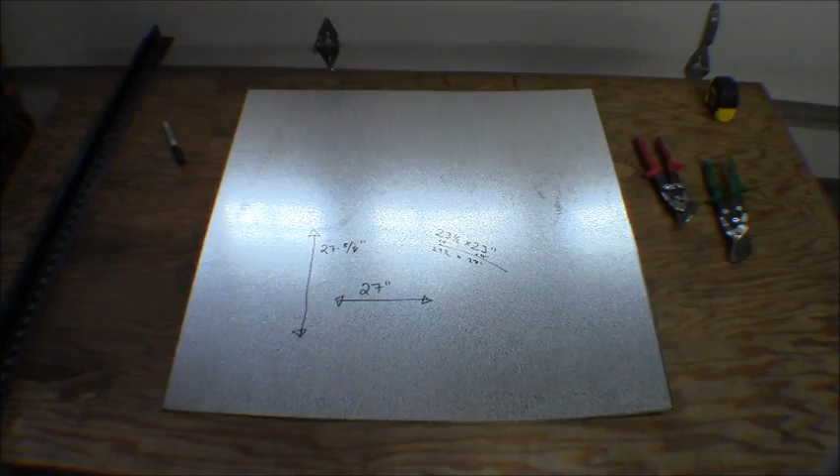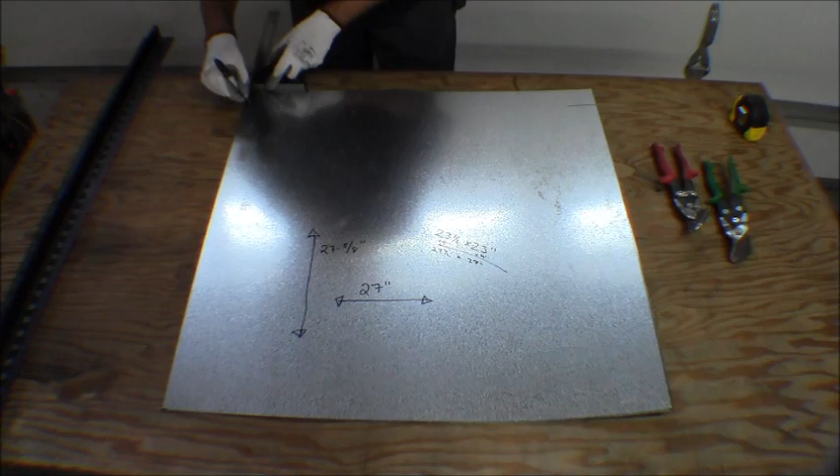Okay, I need to do a 2-inch measurement and mark these off on the sides, the corners. So I got my tape here set to 2 inches. I want the long side to have the overlap on it. So I'm going to go like this. Just an easy way to do it like that. Like I said, this doesn't have to be perfect by any means. I'll do it on both sides here, but just kind of make that easy.

Okay, we're going to want to do our depth. This is how far deep down we're going to be doing our bend. The bend will be on these as well. I want to mark off on these right on the corner junction, and possibly one more in the center just for good measure. Do the same thing on the other side. And we'll be bending these this way too, so I'm just going to mark this one as well. Just on the side.

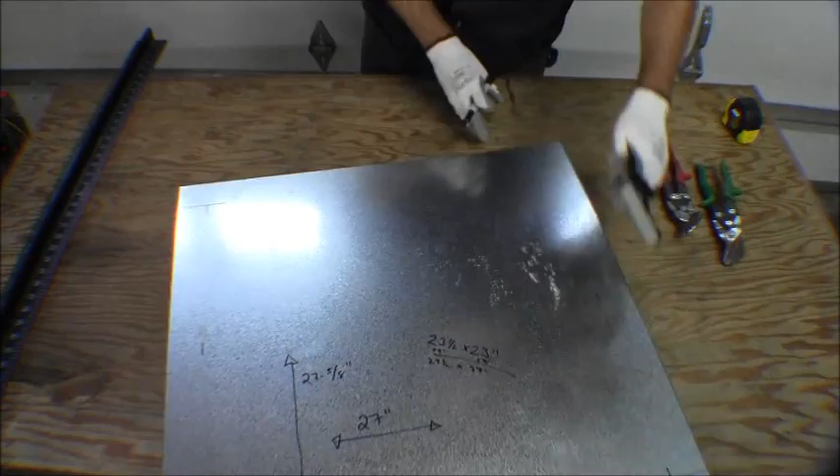Okay. Like I said again, mark, and we know this is going to be our long tabs going that way. So I'm just going to use some of my side cutters, sheet metal offsets. I'll cut these by hand. When you do this, they have on this lower part, basically this curved part, that's the part that's going to be pushing up the sheet metal.

And so if I do it this way, just for reference here, I can do one of each, just so you get an idea. I'm only going to cut back a little bit to about right there. See how this side lifts up onto that, so it already starts to bend. So coming back and bending this, it has that little bit of lip to it, so it catches, so it makes it a little harder. So on this side, instead of doing the green, which would lift up this as well, I'm actually going to come back with the red ones and lift up the side that we're going to be bending first.

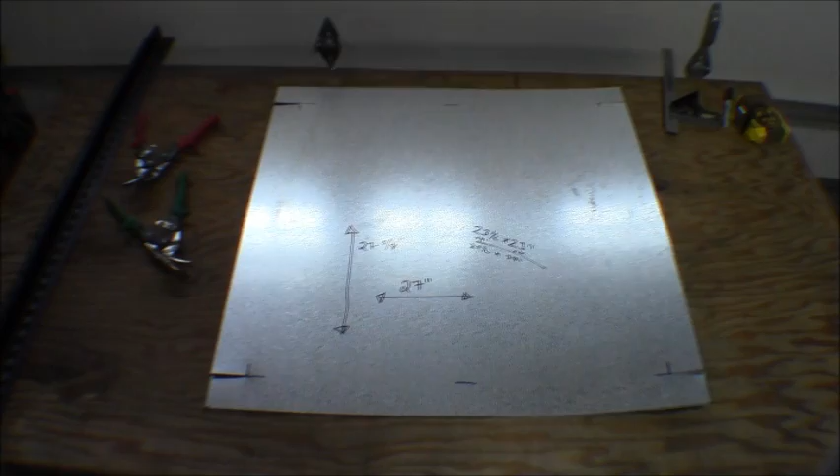Okay, so I'm going to clear out the workspace here. This is a good time to double check your measurements and make sure that where you bend is going to get what you need. Our most critical one is the 23.5. We need 23.5 inch clearance here for the width of our washer. So coming on here, tightening this up, I'm right at 23.5. So I want to make sure when I bend this that I'm not coming inside these lines.

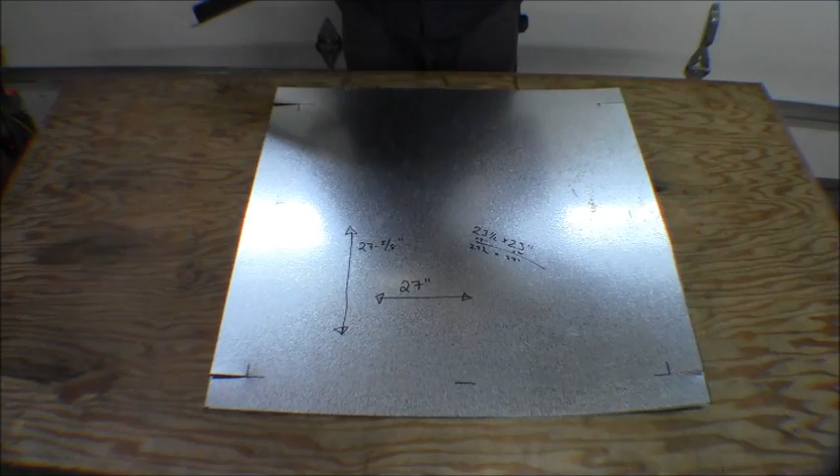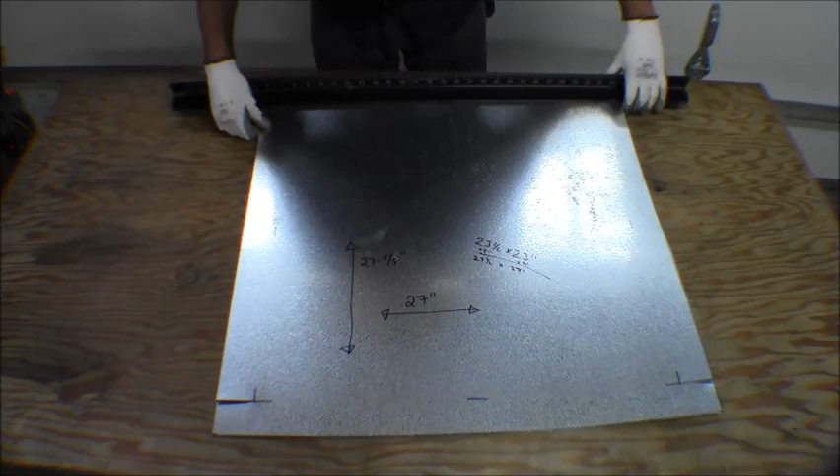So like I said, using the Handler's bender or any other brake or homemade thing that you got. Just gonna slide this in here. I'm gonna go right on that line. Once you get it set, just kind of put a little bit of pressure on it. Push it down, and back or forward until you get a good angle that you like.

We'll kind of bring that around here so you can see our 90 that we got. And pull that off. And that's our first bend. Oh, makes a nice good clean bend on it. And then I'm going to want to bend these in because they're going to get in the way of bending these corners. So before we do that, I'm going to do this side as well.

And this is where it's critical to get our bend right. If you wanted, you could come in and measure the inside, but it kind of makes it tough to do that. But we're just a 1/16, a hair over our 23.5, so that's good there. Down. Good.

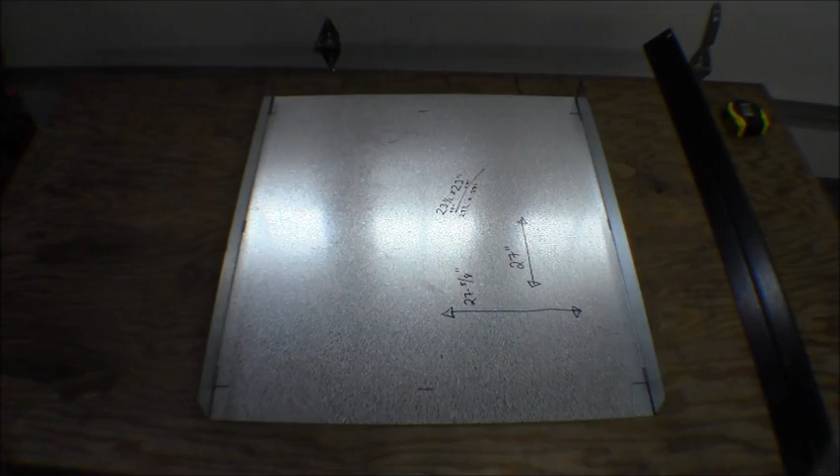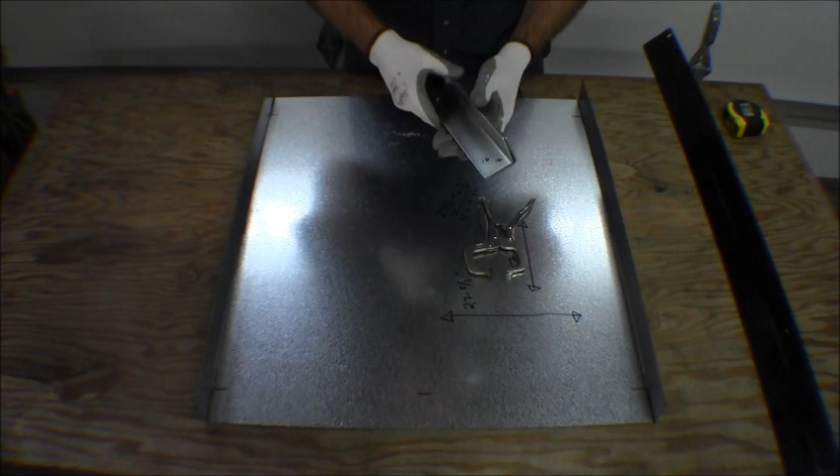We need to bend these tabs in, and you can bend them in by hand if you want. You can't really use this tool because of the gap on it, and I'll show you another way we can do that. Okay, now to bend our tabs in, I had a couple things here, and all I got is just some angle. You could make another bender with this, just like we talked about, a small one. If you put a little gap in there and welded them, it'd make for a really easy homemade bender.

And what I use these for, I couldn't find my square washers. That's usually what I use, but for some reason I can't find them. I'm gonna bring this up and kind of put this right on here, like that, right on our bend, and using our clamp.

And I got that clamp there. I'll be able to bend it now. Kind of hold that one side. That gets it kind of squared up. And there we go. We got that one. Let's do the same thing to the other sides. So now we got those bent.

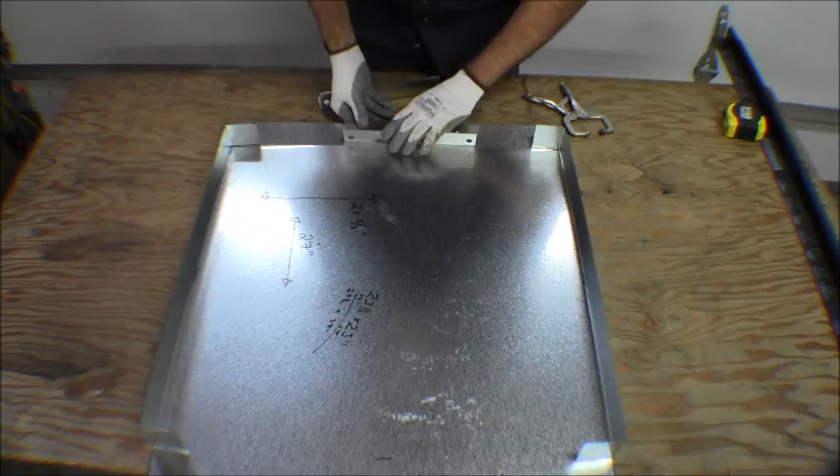Bend going. Okay, and this is where you come in and bend your angle with a piece of wood. Using two pieces of wood on there. Get the length. Or you can use whatever you got. So I'm going to go back to doing this one again. Okay. I'll move it so you can see it here in a bit. I'm just kind of trying to get it set up.

I just got that bend on there and kind of work it up. Not the most beautiful bend on that, but it will hold. Do the other side here.

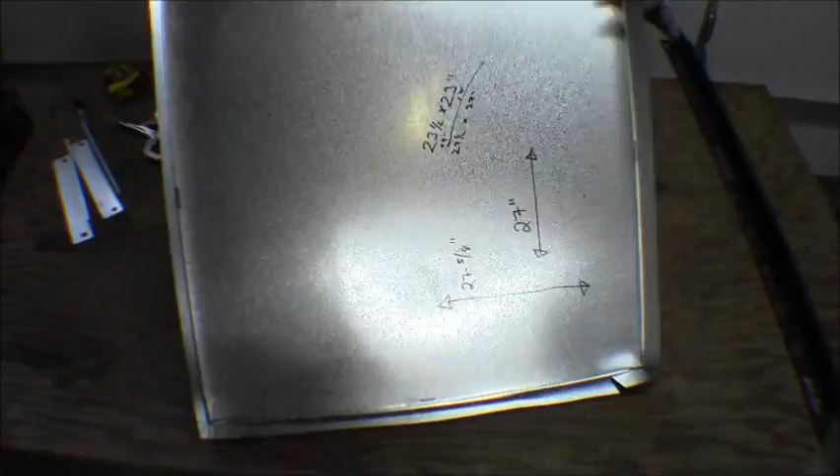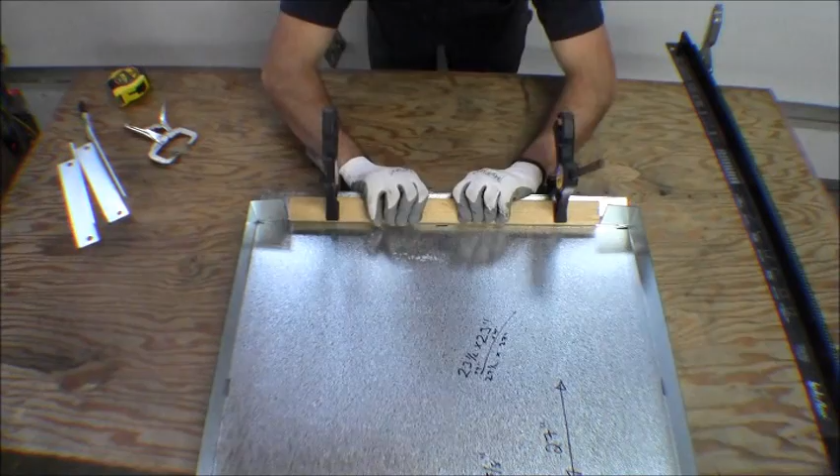Like I said, you could do this for all the bends. You don't need to have one of these metal hand brakes. These will work just fine. Oh, I got it tightened down there. I'll show you kind of the back side of what I got. And now we got that, and we should be able to get ourselves a nice bend on this one. At least better than that last one.

Okay. It's much cleaner. You don't get that ripple in the center like we did trying to do it by hand with the smaller ones. So that's pretty much it for that part. I need to kind of clean up the ends here. Try to square these up a little bit.

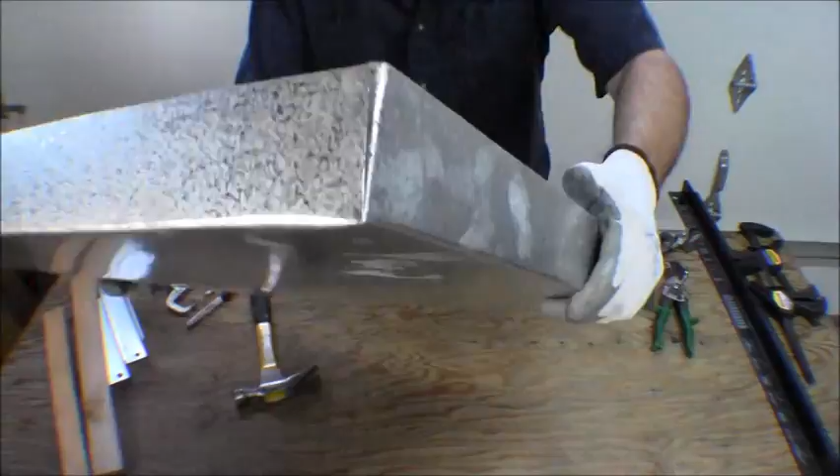Now we're going to do pop rivets. What I want to do is get the best angle I can for my 90 and clamp with some sort of vise grips. And then we can drill through that right there. And the pop rivets I'm using are a sealed kind. I can't remember the name of the brand, USC, but it doesn't say what they are.

But instead of having an open end here, I'll show you what a traditional one looks like. Let's find one. Here's one. So here's a traditional. It's got that little nub on the end, and that pulls through. You usually get a hole in the center. This is completely sealed, so it's good for waterproofing type stuff. You don't need to come over it with any silicone or anything. For this application, does it really matter? No, I just got them, so I'm going to use them.

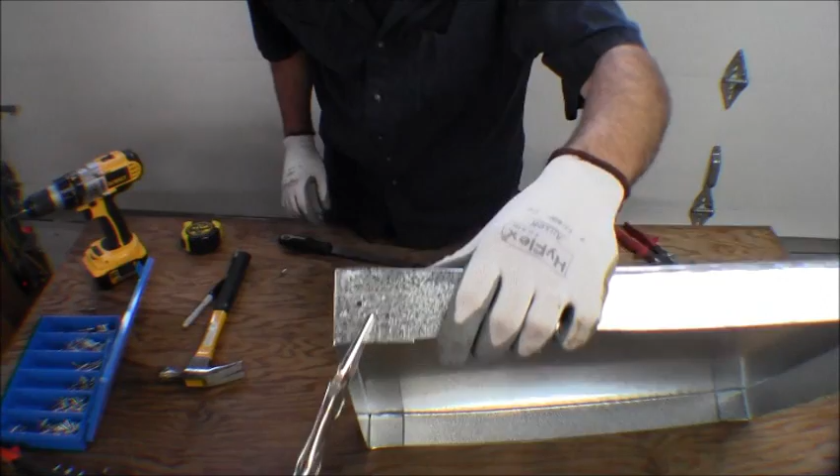So you got to use the appropriate size drill bit for it. And I'm just going to drill both of them there. Let's see how that fits through there. Clean it up until you can get it as snug as you can. Sometimes that includes filing over or kind of rounding it a little bit. You want to get to the point where it sits as flush as you can. This one has a little bit of a raised edge to it. It's just the angle of the rivet.

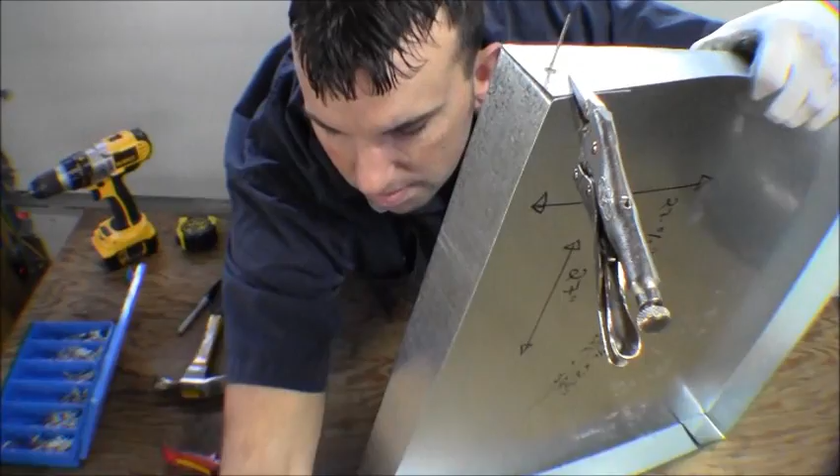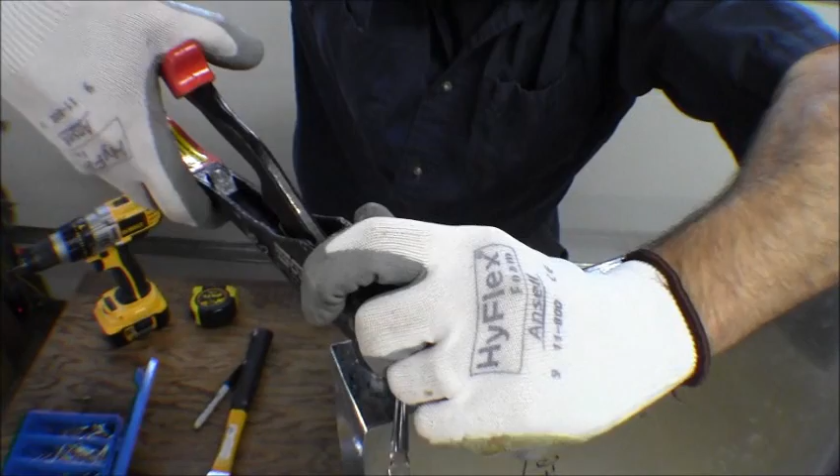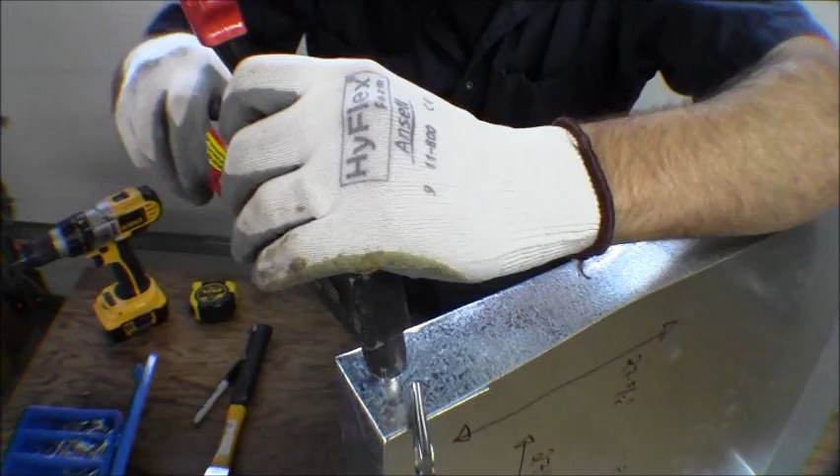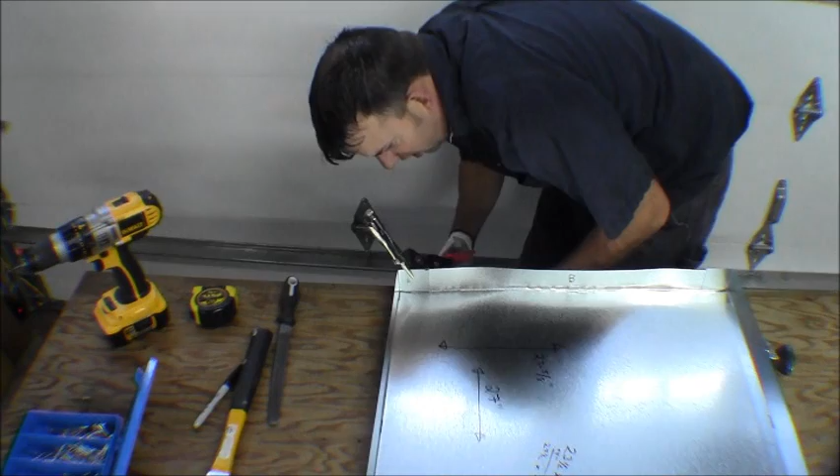Okay, there we go. Now we got the rivet in there. Push that down on it. Give it some pressure while you pull, or squeeze I should say. And these ones that are sealed, what I did there was I pulled that up and then you do it again. Drop it down. Yeah, it's hard to leverage there in front of the camera, so I'll just pull it again here until it snaps off there.

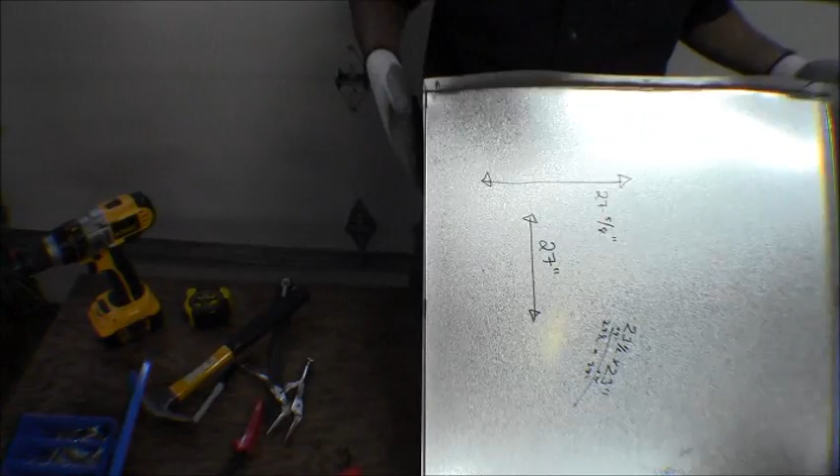You can see the rivet inside. It looks like there's a hole, but it doesn't go through. Like I said, it pulls that up, and that's completely sealed. Now I'm going to just do it on all the other corners here, and we're ready to go from there.

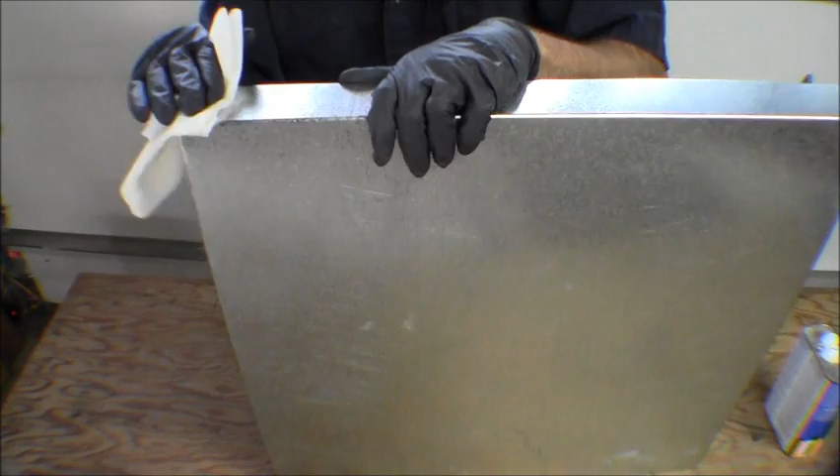So that's pretty good. So what we need to do now is seal it up, and it's good to do a little degreaser first. And anything you got will work. Lacquer thinner, alcohol. And you just want to clean up around everywhere you're gonna silicone or seal up, so you get good adhesion. This will also clean up all the marks from the pen if you need to clean all that stuff up.

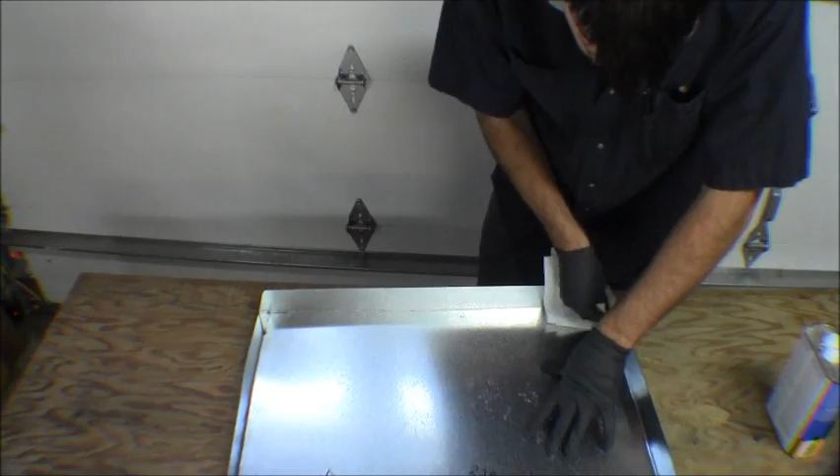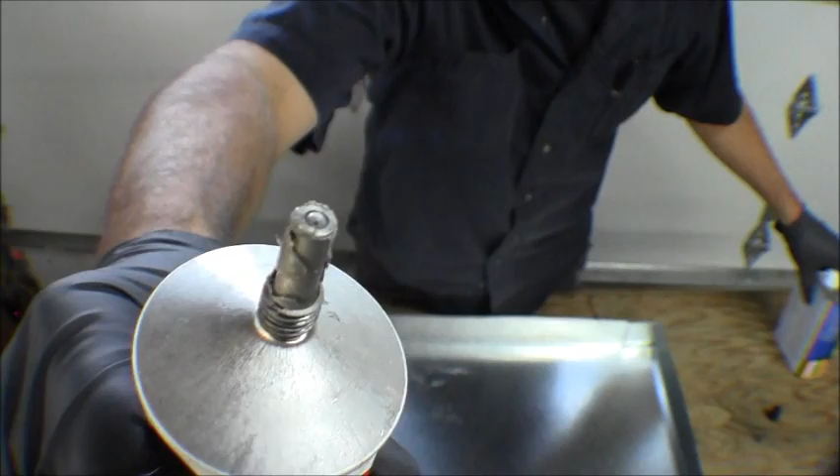And seal all these joints with your favorite sealant. This is one of mine. This 3M Scotch Seal 2084 metal sealant. And this is what we use a lot in sheet metal. This is aluminum colored, so it's already metal, silver colored. So it blends in real nice. And I'm sure you can see it there. So it blends in real good.

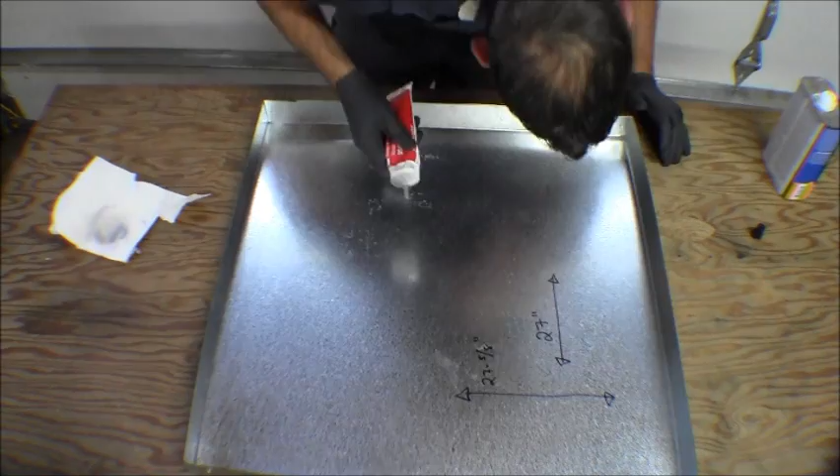I'll start on the inside first here. Okay, so I'm just going to come in and first start in the corner and work my way along that seam. And up. Now, like I said, I don't need to go around the rivet because it's sealed. You can if you want. I mean, it's already up an inch high or so. If I have that much water in there, I've got other problems. So I'm not. It's just to catch enough so it can let me know.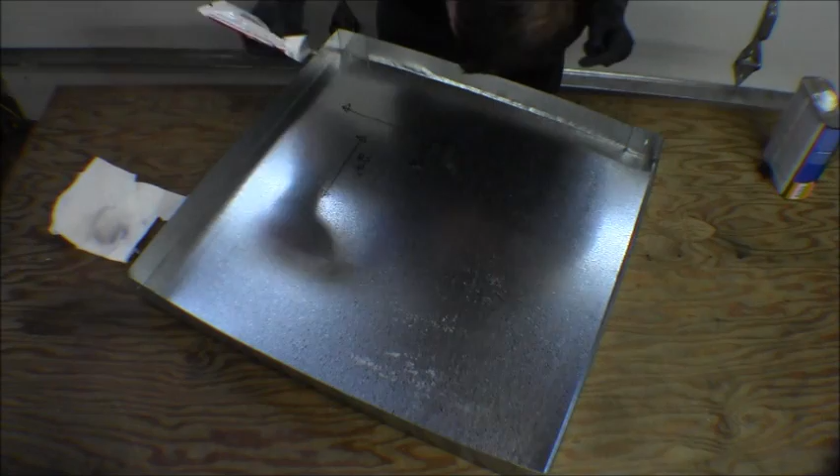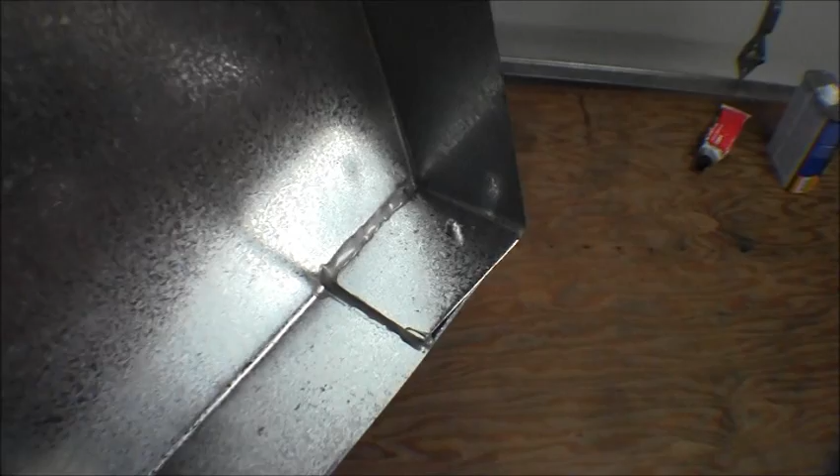I'll give you guys a close-up on that when I get done here. I'll show you what that looks like. Stuff is starting to leak out the bottom, it looks like. Now I was wearing my gloves. Let's see if I can show you a good close-up. Let's see. Kind of see there what I got. And now we got the inside done.

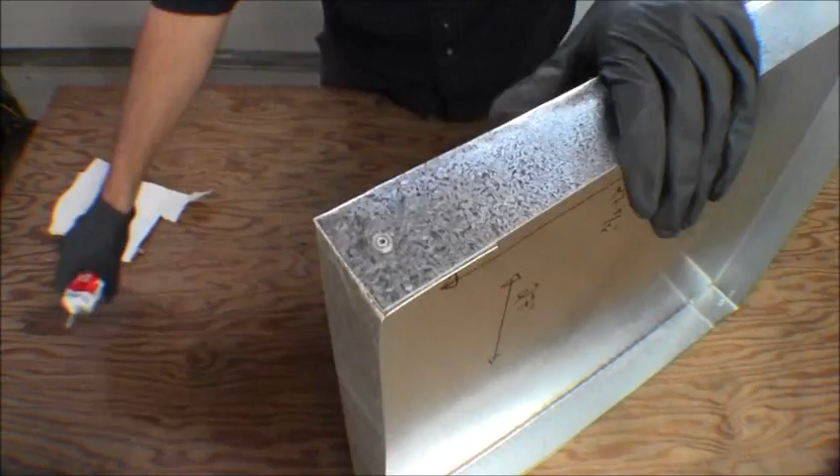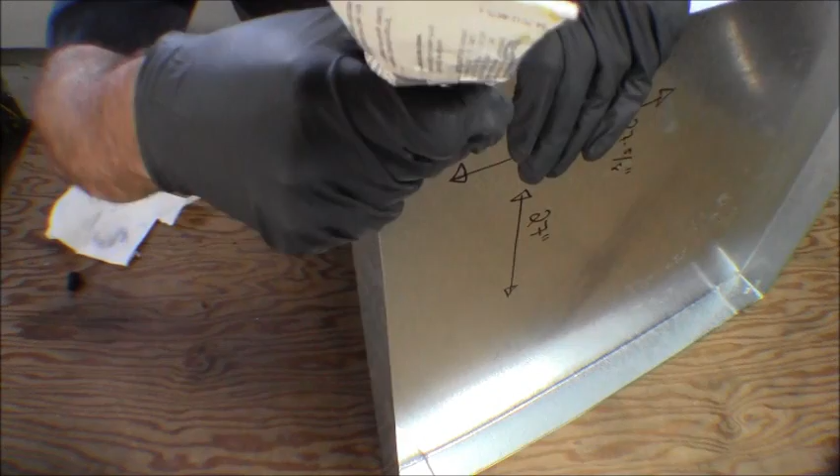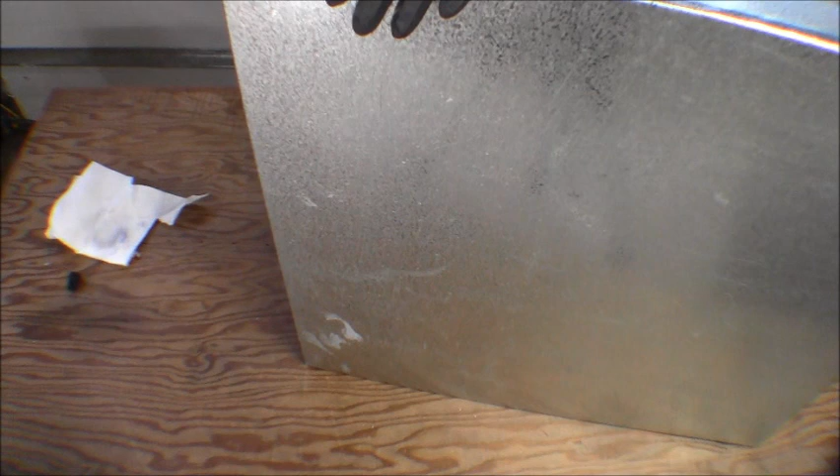First start on the back side. And then I'll do the front side ones. I think I'll start at the top. This makes a nice clean seam. Back over a little bit like that. And it does a really nice job. Looks good. Sometimes when it dries, it'll kind of shrink up a bit, but once we fill that in, it should be okay.

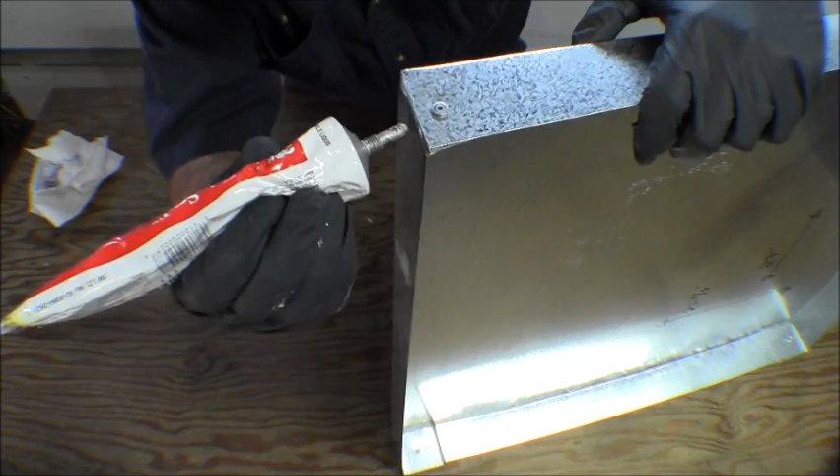Did the back there, now I'm going to do the front side. Try to make this look as good as I can. And probably sealing on the inside is good enough. This just kind of gives it that finished look. That's pretty good. It almost gives it a welded seam look. Now we'll have to let that dry and double check everything, and it looks pretty good so far. There we go.

Now at this point, after it's dried, you could come back over and fill it up with water, make sure it holds if you wanted to. I'm very confident in the way it is. I'm not going to do that, so I'm just going to let it dry, and then I'll test fit it. Make sure that it fits properly.

And the only tricky part about this now is trying to adjust the level on the dishwasher when I'm putting it in. That will be a little tricky. I'll have to bring it out, adjust it, push it back in, because you won't be able to reach up underneath from here to get to it. So that'll make it a little difficult.

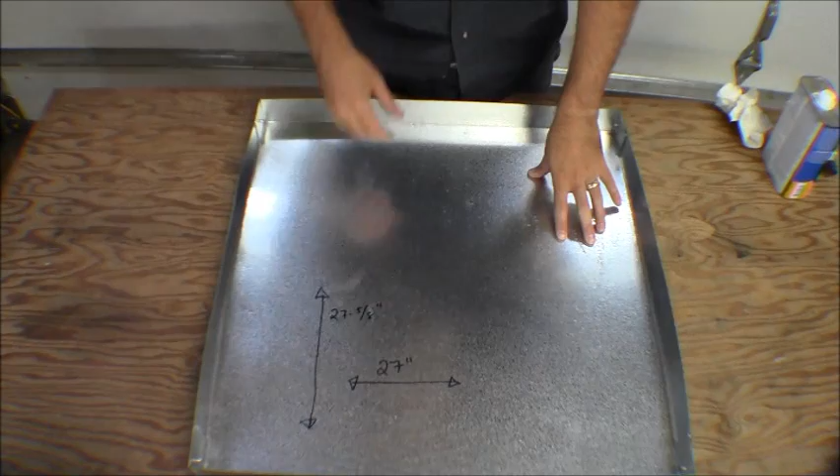But other than that, now we got a condensate catch pan for any overflow. And we'll put a water sensor alarm in the back corner. It's an audible alarm when it senses water, and I'll show you that in the next video. And we'll do the install and see how it looks.